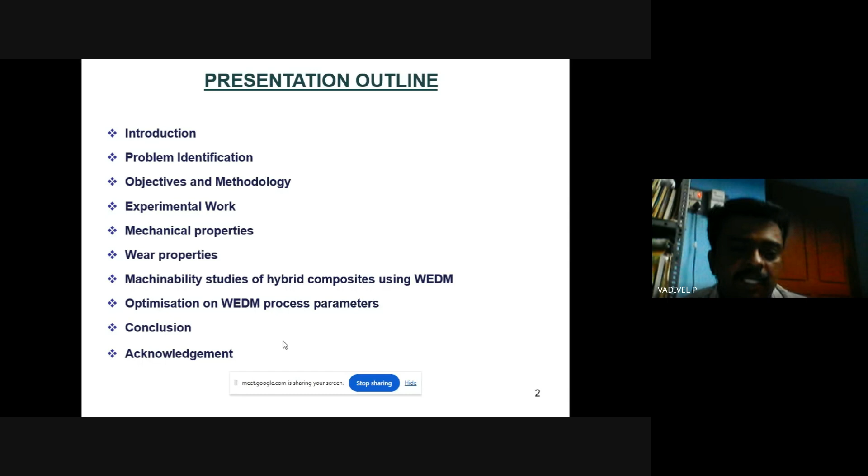First of all we can see the introduction, problem identification, objectives, and the methodology we have conducted, the experimental work, and testing like mechanical properties, wear properties, and machinability studies of hybrid composite using wire EDM. We have also optimized the wire EDM process parameters, and then conclusion and acknowledgement.

So first, everyone knows, but a small introduction about metal matrix composites. We know that a composite material is a combination of two or more dissimilar materials having a prominent interface between them. So it is a combination of two or more dissimilar materials, and here we have to focus on the dissimilar materials. There are different materials which we combine into one part, making the performance output from that. The properties of the resulting material will be superior to the individual materials.

If we have aluminium or steel, or whatever single individual material, the performance will be much lower. So while combining two or three materials, we improve the performance of the materials. Here we have matrix plus reinforcement, that is equal to a composite. We mix the matrix material, having a matrix of aluminium, and reinforcement of two materials, two ceramics, combining together to form a new composite material.

So where are we applying this material? The application is in aerospace, automobile, communication, defense, and also marine engineering. Why do we have to go to this new composite material? Because the high strength to weight ratio will be increased, so strength increases while reducing weight. We have also focused on excellent wear resistance properties, which we have obtained to be improved.

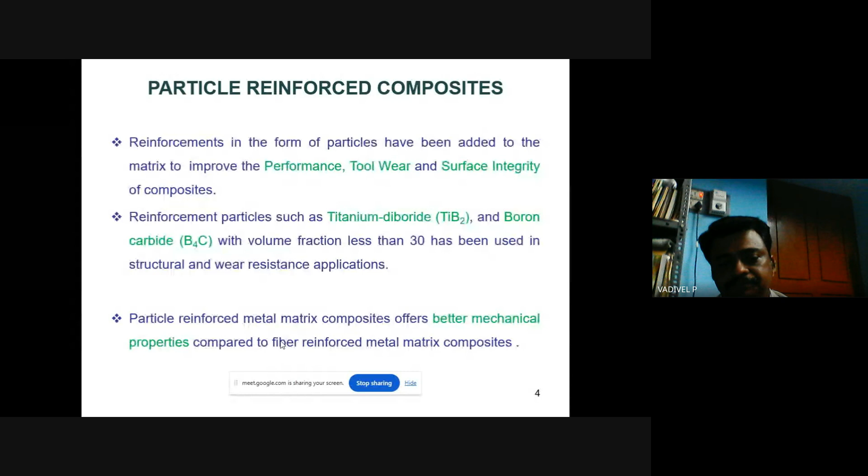I want to present the applications of metal matrix composites in specific components like automotive pistons. The automotive pistons are made of aluminum metal matrices, and it is used in exhaust guide vanes in gas turbine engines, pistons in reciprocating air compressors, drive shafts of automobiles, brake drums of cars, bicycle frames, ventral fins, fuel access cover doors in military aircrafts, and rotating blade sleeves in helicopters. There are a variety of applications used now.

Right now we are using battery operated cars. With electric bikes or cars, we can see that the weight is negligibly less compared to earlier versions of automobiles. It is very lightweight because of the application of metal matrix aluminum composite materials.

The manufacturing methods for producing metal matrix composites: how do we manufacture them? In industry, various methods are used for manufacturing MMC, like diffusion bonding, powder metallurgy, spray co-deposition method, in-situ solidification, and casting processes. In the casting process, it is a very simple, economical, and feasible method to produce the metal matrix composite, so for simplification of production we have chosen the casting process.

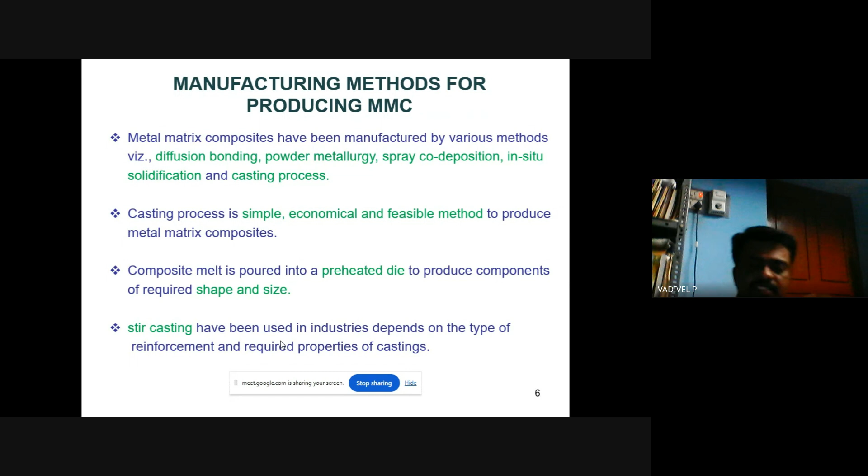This is the schematic diagram of a stir casting setup, using an electrical motor with a stirrer screw, reinforcement furnace, crucible, rotor, and liquid metal. The furnace temperature is maintained at an average of 780 degrees Celsius, the stirring speed is maintained at 800 rpm, and the stirring time is a maximum of 10 minutes. The die is preheated to 225 degrees Celsius, and the reinforcement preheating temperature is 300 degrees Celsius.

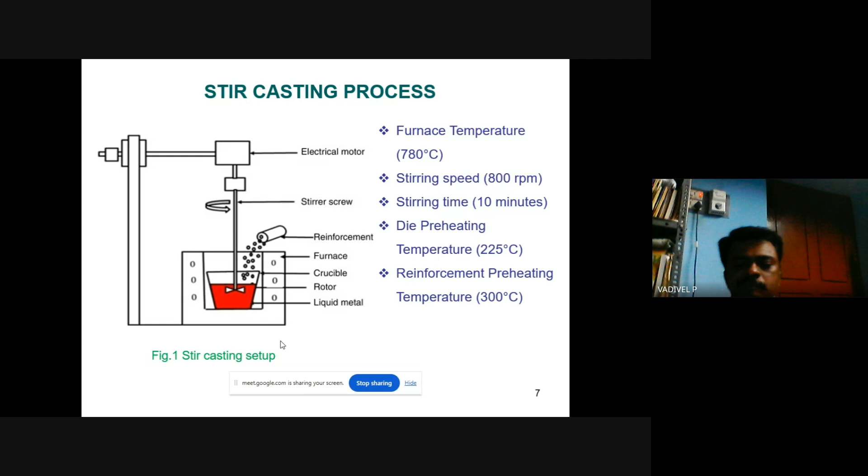The preheating of the reinforcement is required because, compared to the aluminum matrix which is softer, the reinforcing ceramic is a very hard material. So the bonding will not be proper. To improve that bonding, we have to preheat the reinforced material up to a particular temperature, and it should be maintained at that temperature for a few minutes.

Now we come to the machining of metal matrix composites. Machining of composites can be processed by conventional or non-conventional machining processes. After preparing the new metal matrix, it is machined using conventional and non-conventional machining processes. We have used non-conventional machining processes because conventional machining has lack of capability for intricate shapes, profiles, and hard reinforcements in composites.

The cutting and machining of this material is not feasible with conventional machining processes. We may not attain proper shapes or profiles, and sometimes the hard reinforcement will come out of the material. So instead of conventional machining, we have chosen the unconventional machining process.

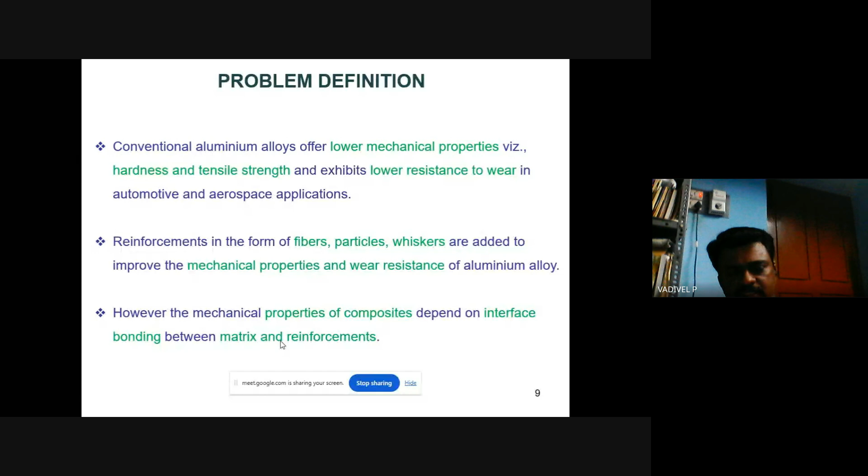Many previous researchers have reported that weight percentage of reinforcement - here we have chosen titanium diboride and boron carbide - influences the mechanical properties of the casting. Also, the stir casting process parameters like pouring temperature and stirrer speed improve the mechanical properties of the composite. These are the parameters which influence the mechanical strength of the aluminum composite material.

These three parameters have maximum influence, so we have focused on them. When coming to wear properties, dry sliding wear parameters like load, velocity, and sliding distance influence the wear rate of the material. Hence we have chosen and optimized these dry sliding parameters for obtaining the minimum wear rate.

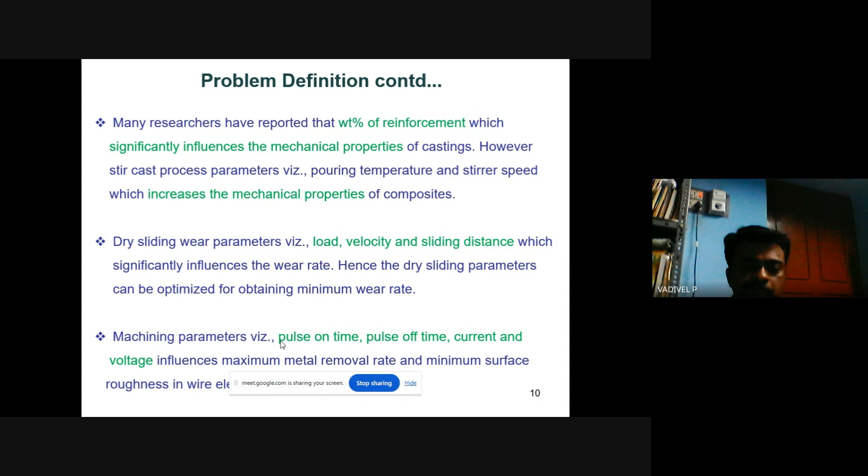When coming to the machining parameters in wire EDM: pulse on time, pulse off time, current, and voltage. These four parameters influence the maximum metal removal rate and minimum surface roughness in the wire electric discharge machining process. So these are the objectives of the research here.

The objective is to manufacture the metal matrix composite by reinforcing titanium diboride and boron carbide in the matrix of aluminum LM13 alloy by the liquid metallurgy route, and investigate the microstructure of reinforcement particles. We will discuss material properties like hardness, tensile strength, and ductility with varying percentages of titanium diboride and boron carbide, and also tribological properties like wear. We are going to focus this research on these areas.

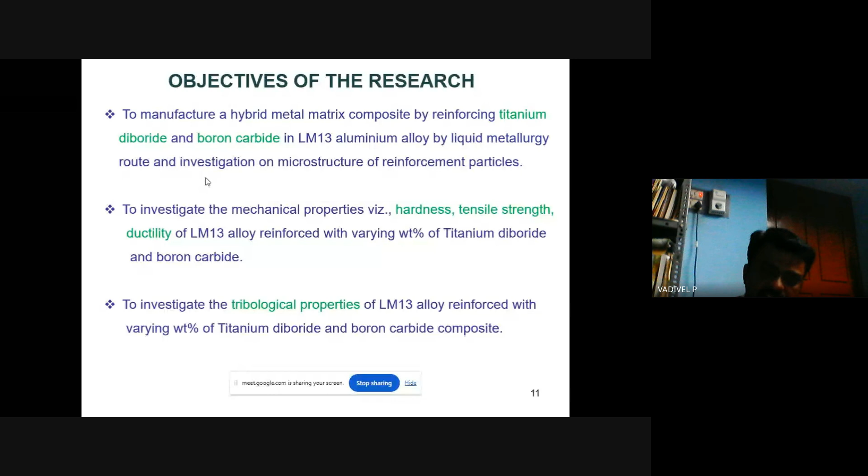We have chosen reinforcement of titanium diboride up to 10 weight percentage and boron carbide up to 5 weight percentage, and investigated the effect of process parameters like pulse on time, pulse off time, current, and voltage in wire EDM, to optimize the wire electrical discharge machining process parameters for obtaining maximum metal removal rate and minimum surface roughness of the aluminum LM13 hybrid composites.

Here is the research methodology flow chart with LM13 aluminum alloy and boron carbide, which in general we call ceramics. First we prepare the metal matrix of aluminum LM13 alloy - we melt the aluminum alloy, and the reinforcement is preheated and added to the LM13 aluminum alloy.

After that, we prepared the composite melt using the stir casting process with varying weight percentage of 0 to 10 weight percentage titanium diboride and 5 weight percentage boron carbide. After mixing is done, the manufacturing of the aluminum alloy composite is complete, and then the hybrid composite is analyzed for microstructure, hardness, tensile test, and wear test.

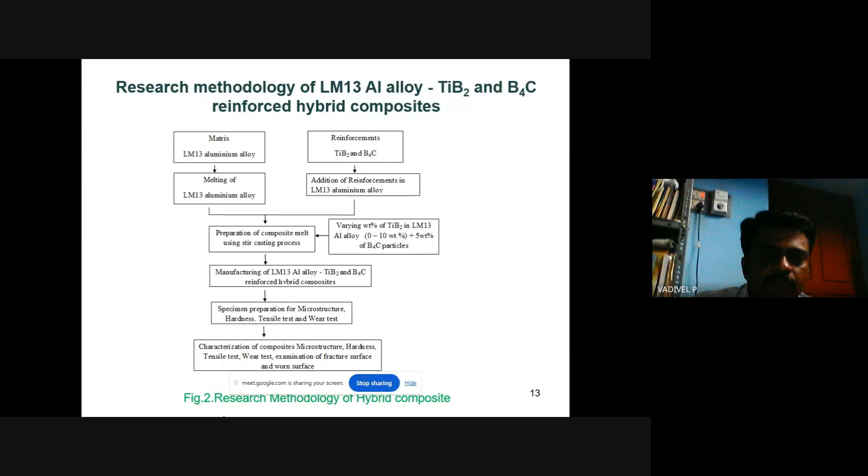For the wire EDM machine, we have chosen the pulse on time, pulse off time, current, and voltage. Then the design of experiments using RSM, response surface methodology, has been done. Then machining of the composite as per the experimental design, and measuring the responses, namely the metal removal rate and the surface roughness.

We have done the analysis of variance and developed the regression analysis using the ANOVA table, and developed the regression equation for the material removal rate and the surface roughness. Then finally, we optimize the wire EDM process parameters for higher metal removal rate and minimum surface roughness value.

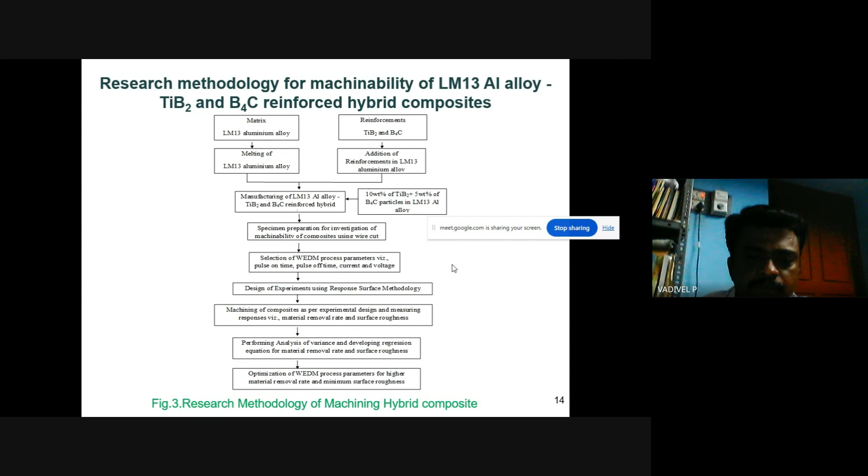What we have done, in two stages: one is where we prepared the new hybrid material and investigated the material properties, and the other is where we did the machining process parameters and identified the conditions for metal removal rate and minimum surface roughness. So this is the work plan of what we have done.

In manufacturing, we have done the aluminum alloy with boron. We mixed the aluminum matrix and composite materials using the stir casting process, investigated the mechanical properties of this new hybrid composite by stir casting, and studied the tribological behavior of the LM13 aluminum alloy with titanium diboride and boron carbide particulates by stir casting.

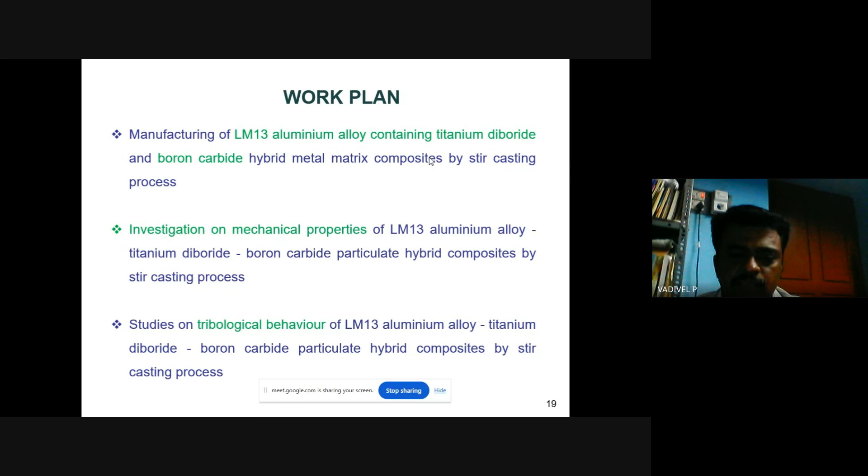We conducted machinability studies of the aluminum alloy particulate hybrid composite using wire electrical discharge machining. For optimization, we performed the electrical discharge machining process to achieve higher metal removal rate and minimum surface roughness of the LM13 alloy with titanium diboride particulate hybrid composites.

So here we come to the experimental work: how the manufacturing of this LM13 aluminum alloy with boron carbide and titanium diboride is done. First we had the matrix aluminum alloy, then the weight percentage of titanium diboride was varied from 0 to 10 weight percent, with a constant 5 percent of boron carbide kept, and prepared using the stir casting process.

We varied the percentage of titanium diboride from 0 to 10, with a constant 5 percent weight of boron carbide for this process. The hybrid composites were prepared using a stir casting setup consisting of an electrical induction furnace with a melting capacity of 780 degrees Celsius, and a stainless steel crucible with a melt capacity of 2 kg.

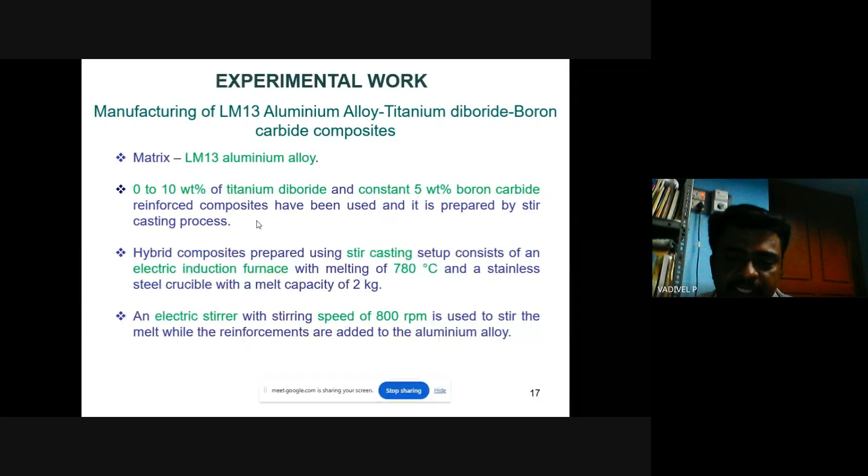Safety must be maintained while using this stirrer speed, because it may injure the person operating the electric stirrer. So finding the optimum value of the stirrer speed is very crucial, and we conducted many trials with very careful safety precautions.

We have chosen the cylindrical die made up of die steel, because it will be useful for machining the hybrid material. Some other researchers have used a rectangular or square shape material, but we have chosen the cylindrical die because for machining this aluminum material, the cylindrical die is very much helpful in machining.

The aluminum alloy is melted in the furnace, and the reinforcement is preheated to 300 degrees Celsius. The preheating of reinforcement is very important, because if the matrix aluminum metal is at a very hot temperature and the reinforcement is not preheated, the bonding between the aluminum material and the reinforcement is not good.

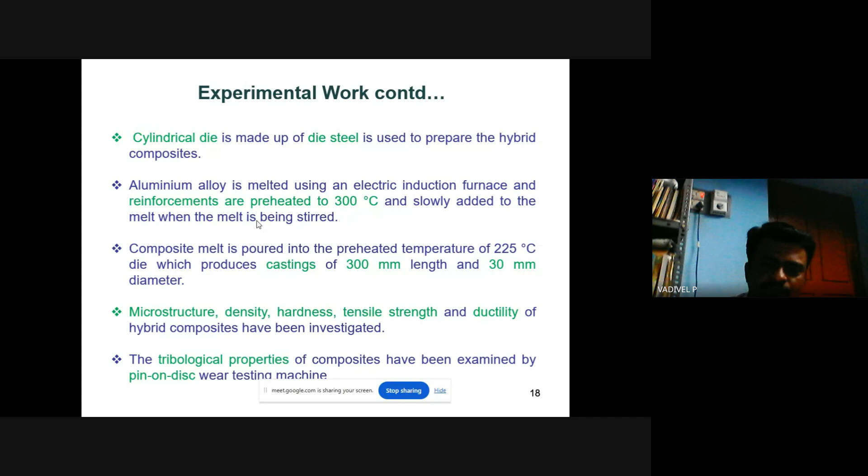In the first trial, preheating was not done for the first two or three trial experiments. At that time we identified that the bonding between the aluminum and the titanium diboride and boron carbide had no proper bonding, so it breaks like a brittle material. The titanium diboride was not fully mixing with the aluminum alloy.

After preheating, at the time of the seventh trial, we used the preheated material, so the bonding is very good between the aluminum and the reinforcement material.

After preheating to 300 degrees Celsius, the reinforcement is slowly added to the melt and stirred at a speed of 800 rpm. The composite materials are preheated to a temperature of 225, and importantly, the die is also preheated up to 225 degrees Celsius. So the die is preheated and the reinforcement is also preheated - these are the main parameters we focused on in this work.

The casting which we produced is about 300 length and 30 diameter. After that, the microstructure, density, hardness, tensile strength, and ductility of this hybrid composite has been investigated, and the tribological properties of composites have been examined on the pin on disc wear testing machine.

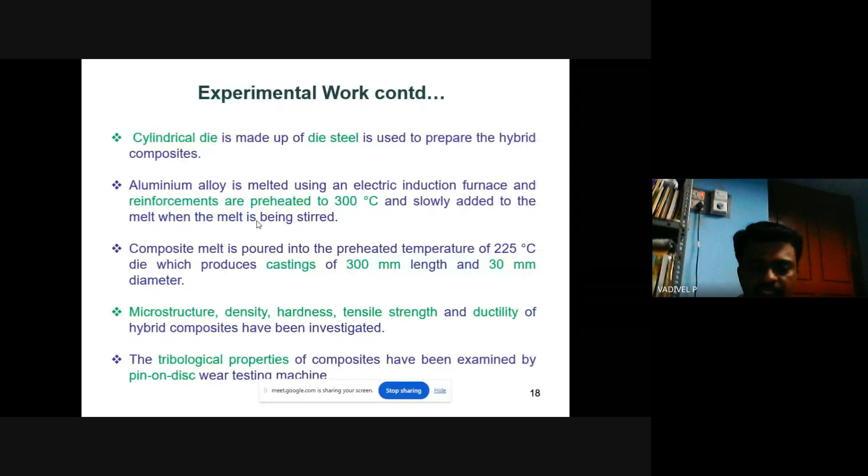Worn surface of the wear test specimen has been analyzed. The machined surface is analyzed by using the SEM.

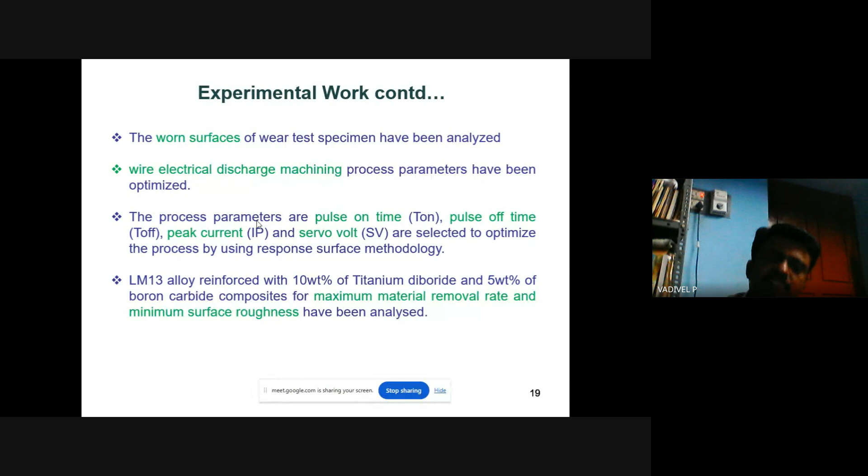The wire electric discharge machining process parameters have been optimized. The process parameters are pulse on time, denoted as T on, pulse off time, T off, peak current denoted as IP, and servo voltage SV, selected to optimize the process by using RSM, response surface methodology. These are the parameters in the wire EDM machine used for optimization.

The LM13 aluminum alloy reinforced with 10 weight percentage of titanium diboride and 5 weight percentage of boron carbide composites for maximum metal removal rate and minimum surface roughness have been analyzed. We chose 10 and 5 weight percentage because these are the maximum weight percentages of these ceramics used for analysis of MRR and minimum surface roughness.

First we tested the element, pure aluminum. Before manufacturing these hybrid composites, before processing and starting the work, we tested using FESEM analysis, field emission scanning electron microscope, the elements which are present in the LM13 aluminum alloy.

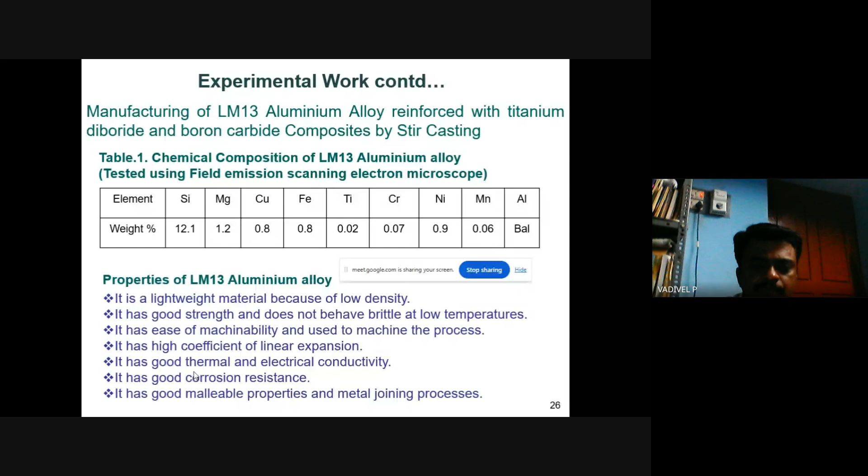The physical properties of the LM13 aluminum alloy: it has a density of 2.7, and the melting point is 695 degrees Celsius. The modulus of elasticity is 73 megapascal. Ultimate tensile strength is 572 megapascal. The Poisson's ratio is 0.33, the fatigue strength is 159 megapascal, and the yield strength is 503 megapascal.

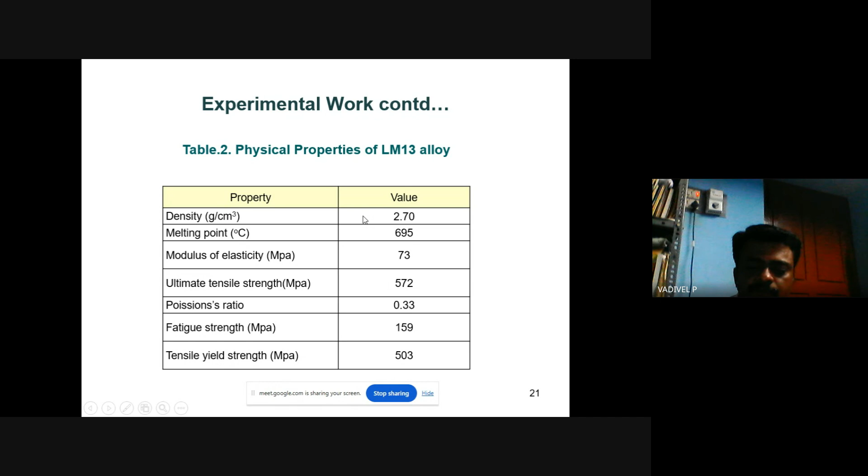The physical properties of the ceramic we have used is boron carbide. We selected boron carbide because of its extreme hardness, and it is difficult to mold to high relative densities while not utilizing sintering aids. It has good chemical resistance, good nuclear properties, and low density. Because of these important properties, we have chosen boron carbide.

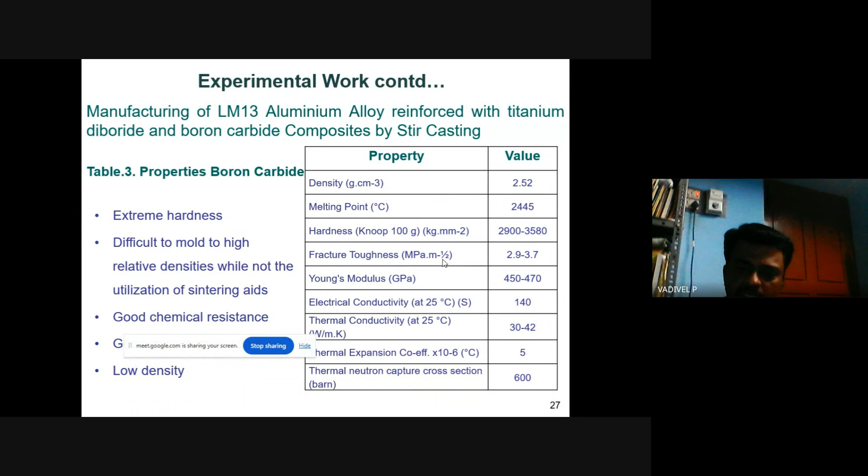The property values are listed here: density, melting point, hardness, fracture toughness, Young's modulus, electrical conductivity, thermal conductivity, thermal expansion, and thermal neutron capture cross section. With all these property values, we have selected boron carbide.

This is a list of properties of titanium diboride. This is because impact resistance is needed for armor. Titanium diboride is used as resistant in armors and cutting tools, crucibles, neutron absorbers, and wear resistant coatings. Because of these advantages and very good properties, we have chosen titanium diboride.

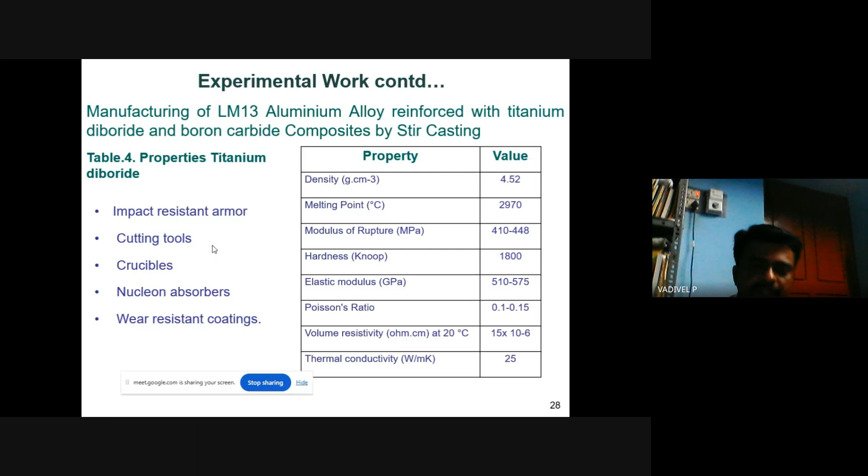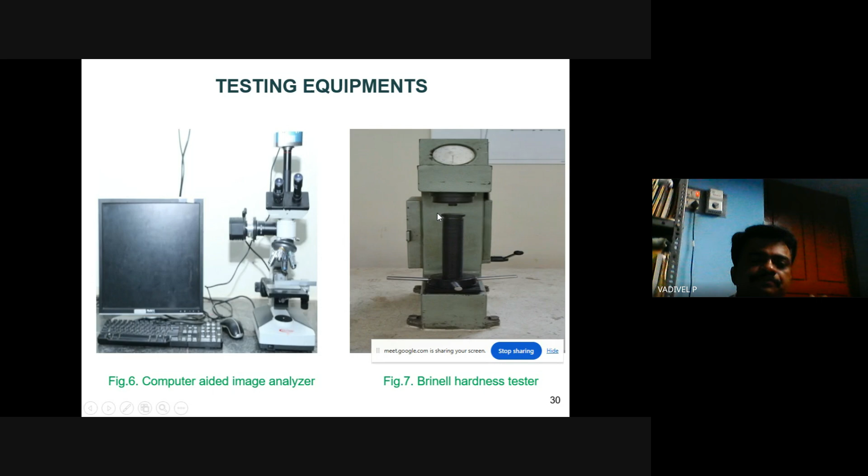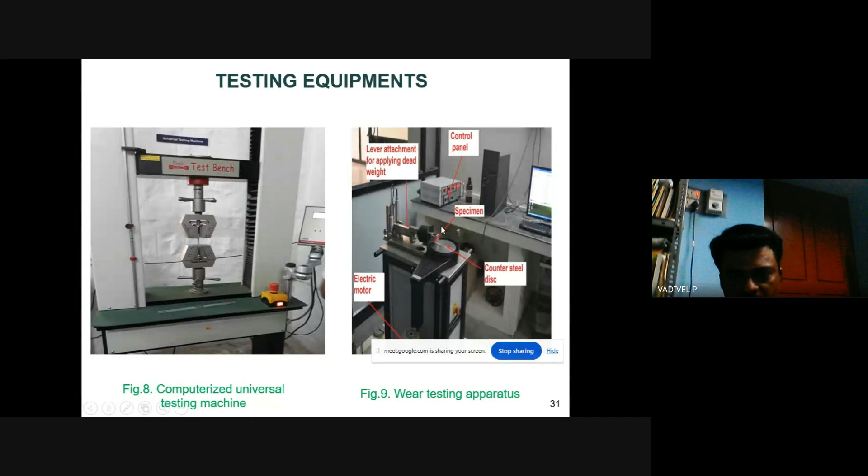This is a counter steel disc. The specimen is rotated against the disc, and the electric motor here is used to rotate the disc.

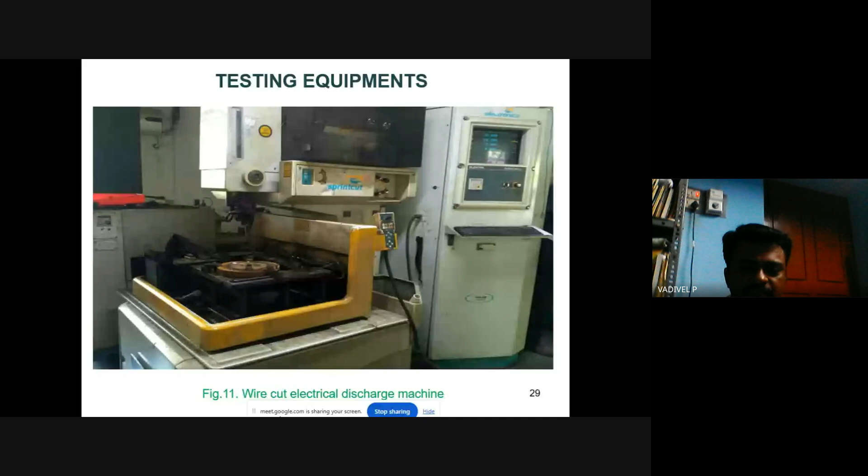The third composition is LM13 with 2.5 weight percentage of TiB2 and 5 weight percentage of boron carbide. The fourth one is LM13 with 5 TiB2 and 5 B4C. And the last one is 10 TiB2 and 5 boron carbide.

The weight percentage of titanium diboride ranges from 0 to 10, and the weight percentage of boron carbide is 0 to 5. As already discussed, boron carbide is kept constant at all levels, and we have varied the weight percentage of titanium diboride.

The ultimate tensile strength of the obtained material is 121 megapascal, 138 megapascal, 151 megapascal, and 174 megapascal. Finally, the percentage of elongation is 11, 9.2, 9, and 8.1. These are all the mechanical properties we obtained by varying the weight percentage of the reinforcements.

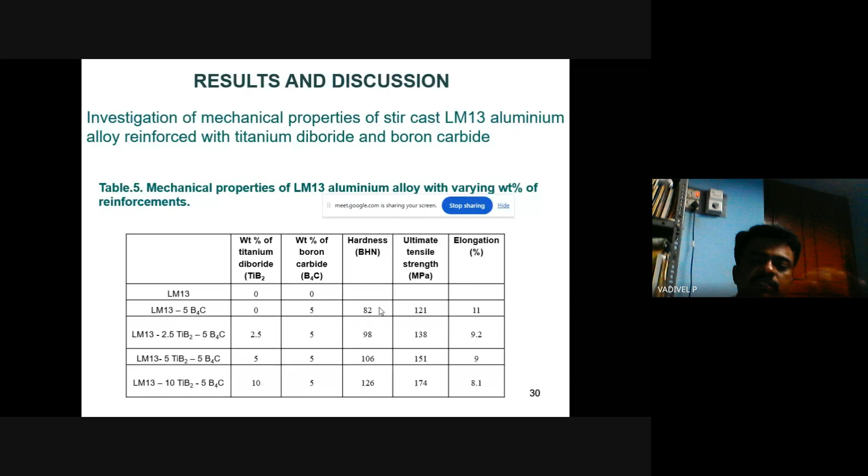So in the microstructure you can see the titanium diboride and boron carbide were uniformly dispersed in the aluminum. The first picture shown is A. Picture A is the pure aluminum.

LM13 aluminum alloy with the dispersed reinforcement. Here is the microstructure of LM13 aluminum alloy. In picture B, you can see the titanium diboride and boron carbide.

This is the particle shown in the red mark, that is titanium diboride and boron carbide. This is attributed to the high stirring speed which produces a vortex during the process of composite formation.

The particles are distributed throughout the material. So the microstructure study reveals that the mixing of the aluminum matrix and the reinforcement is uniform all over throughout the matrix.

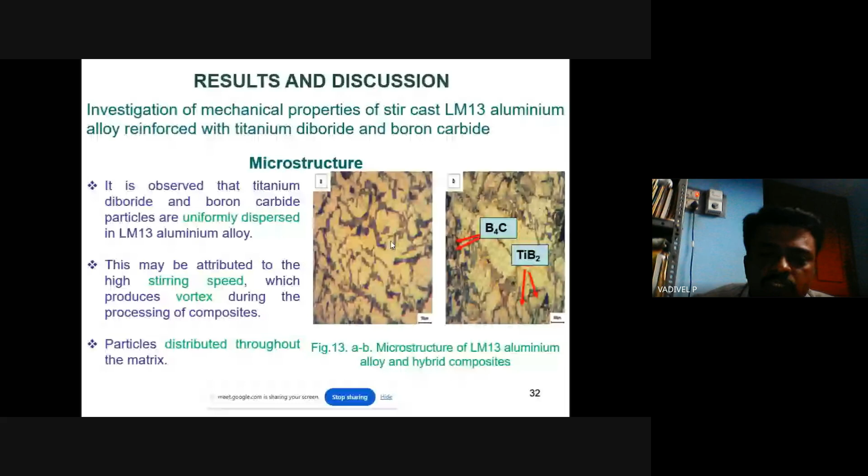So to confirm this mixing or dispersion, we have done the microstructure study for several samples.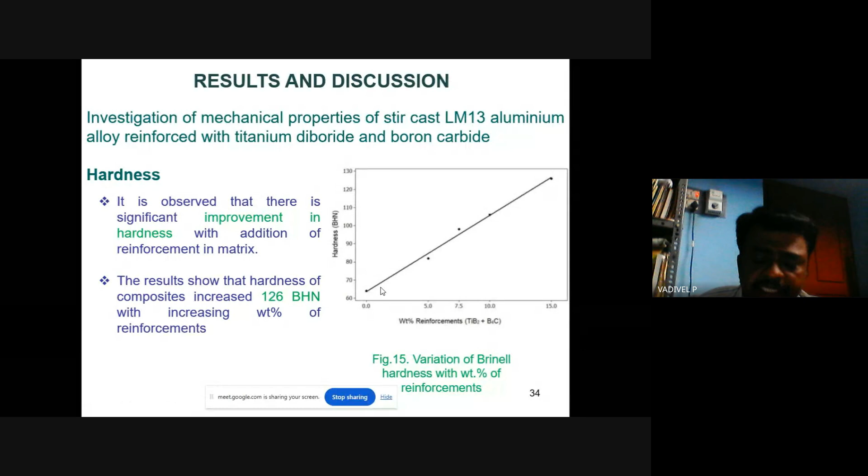While plotting the tensile strength, we have reinforcement on the X axis and tensile strength in megapascal on the Y axis. The test results show that the maximum strength of 174 megapascal is observed for composites containing 10 weight percentage of titanium diboride and 5 percentage of boron carbide.

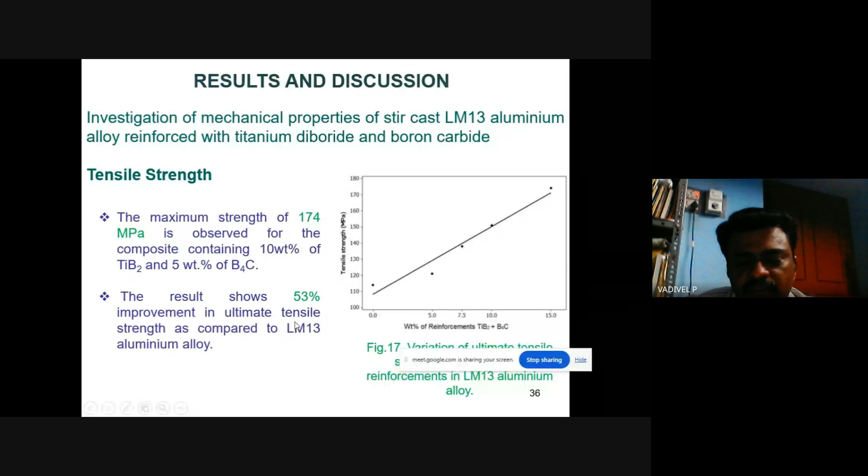So the maximum weight percentage of ceramics has the highest tensile strength we obtained, which is 174 megapascal. When compared to the earlier results, this is improved, with the ultimate tensile strength increased by 53 percentage compared to the LM13 aluminum alloy. So this is a very good result which we obtained after many iterations.

And now coming to the fracture surface of the hybrid composites. Here you can see the micro pore holes between the crack nucleating points. So in this fracture, the fracture surface shows the same result.

You can see some dimples, meaning there are some valleys. Dimples are shown here, like if we break a chalk piece, the cross section of the area will not be uniform. There will be some holes or projections.

So we can see the dimples here. The hybrid composites had dimples on the surfaces. This indicates better interface bonding between the matrix and the reinforcements. Because of these dimples, it is confirmed that there is better bonding between the matrix and the reinforcement.

So the micro pores between the matrix and the reinforcement act as a crack nucleating point, and the crack propagates towards the particle agglomeration regions, which results in the fracture of the composites. Because of these micro pores, the crack is initiated at some point and tends to break the sample.

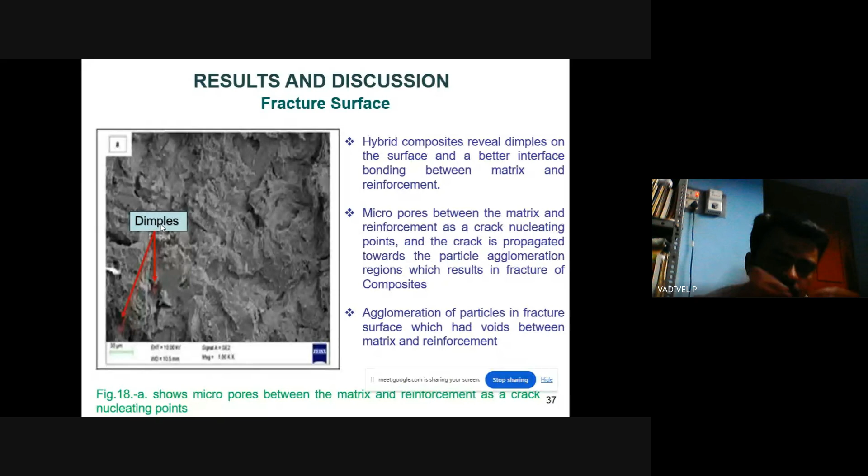So the agglomeration of the particles in the fracture surface had voids between the matrix and the reinforcement material.

So this picture shows the dimple, meaning it is like a hollow, shown with an arrowhead. The TiB2 is placed here, and boron carbide is placed here. This shows that in some particular regions, all the ceramics are evenly distributed.

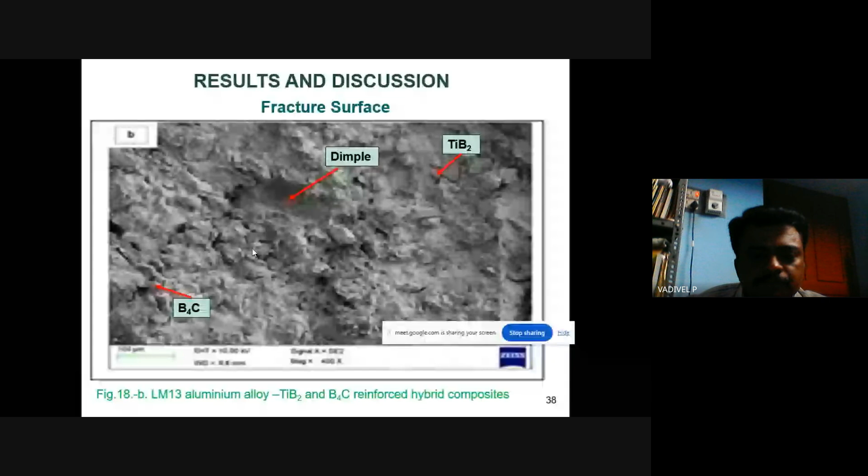See the agglomeration in this picture, the mixing of material and ceramics is shown. Because of this agglomeration, the crack may be initiated.

Now we are coming to the dry sliding wear properties, the effect of sliding distance. The wear test is done with a sliding distance of 2000 meters under a constant load of 20 Newton.

The weight loss decreased up to 67% by adding 10 weight percentage of TiB2 and 5 weight percentage of boron carbide. For this material, the wearing is done, and the weight loss stopped at some particular point. After that, the weight loss is very negligible.

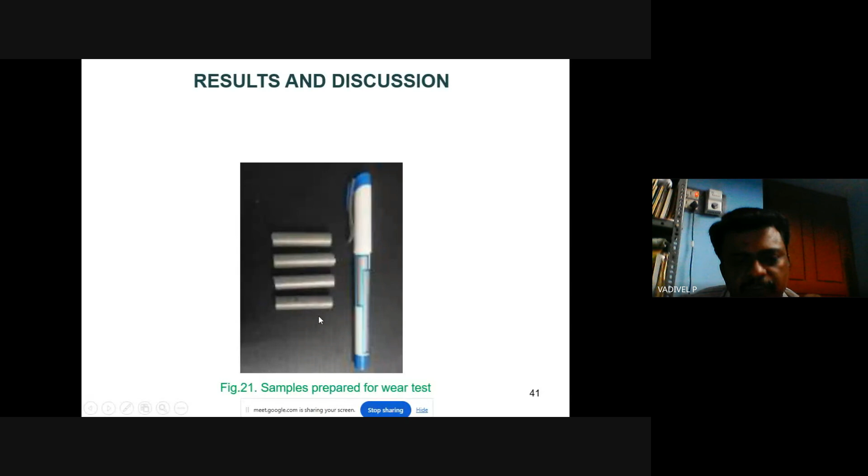The wear rate of the composites has been decreasing with increasing weight percentage of reinforcement in LM13 aluminum alloy, and the minimum wear rate of 0.0068 milligram per meter is observed in the study.

The next plot is between the coefficient of friction and the sliding distance. The coefficient of friction decreases with increasing sliding distance. We know the value of friction in brakings, in brake drum and brake shoe - the friction between the brake drum and the brake shoe. Without friction, the brake will not stop and the vehicle will not stop.

For that purpose we have undergone this friction study. The average coefficient of friction we obtained, with 15 weight percentage of reinforced composite and matrix, is 0.39 and 0.312 respectively.

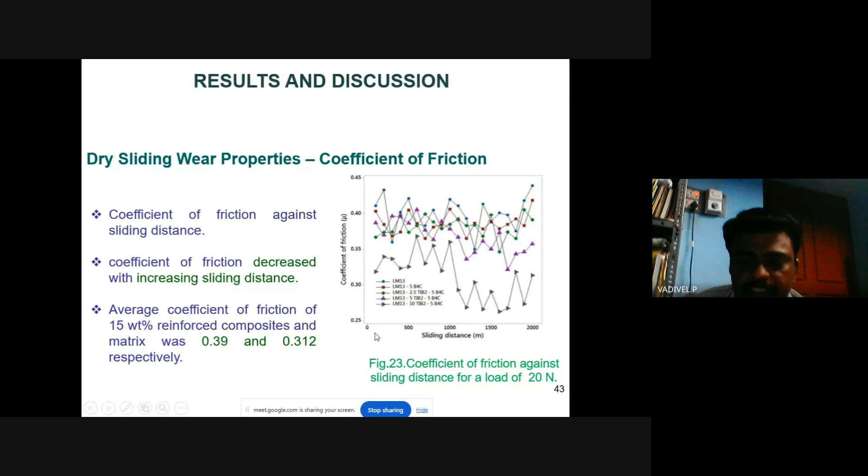In this study, zero weight percentage of TiB2 and zero weight percentage of boron carbide, that is only LM13 aluminum alloy, is used. The wear test is done on the pure LM13 aluminum alloy.

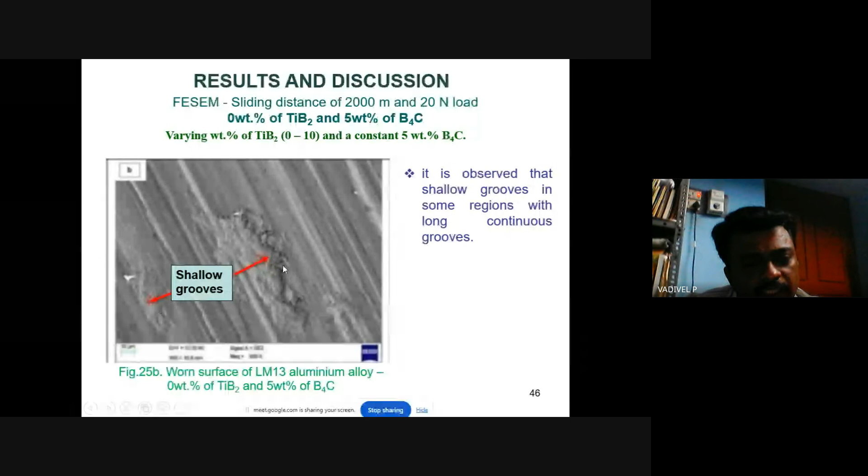This is the next level, with 2.5% titanium diboride and 5% boron carbide. Here you can see debris and shallow grooves observed on the surface, which reveals continuous grooves and shallow grooves parallel to the sliding direction.

The next one is 5% titanium diboride and 5% boron carbide. Here you can see fine grooves on the surface, which is likely attributed to the high hardness of the composites, decreasing the weight loss observed during the wear test.

The next one is 10% titanium diboride and 5% boron carbide. One surface of this specimen with 10 and 15 weight percentage shows fine grooves as compared to the other composites. Compared to the previous ones, the grooves are very smooth and fine, following the sliding direction of the material, which gives a good result.

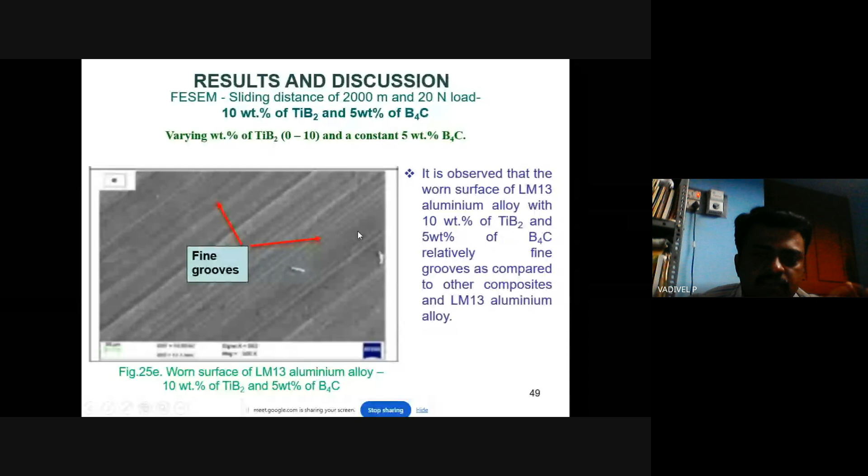With the load test, this is the FESEM image with 20 Newton of load applied on the specimen. With 30 Newton load applied on the wear test apparatus, we obtain shallow grooves.

When 40 Newton of load is applied, we observe deep continuous grooves, and delamination is also noted. With a load of 50 Newton, delamination is maximum, revealing deep grooves with delamination observed in most regions. The composite tested at lower load shows fine grooves, while delamination becomes predominant at higher loads.

Now we come to the machinability studies of this hybrid composite of aluminum alloy, titanium diboride, and boron carbide, using the wire electrical discharge machine. This is the picture of the wire EDM setup.

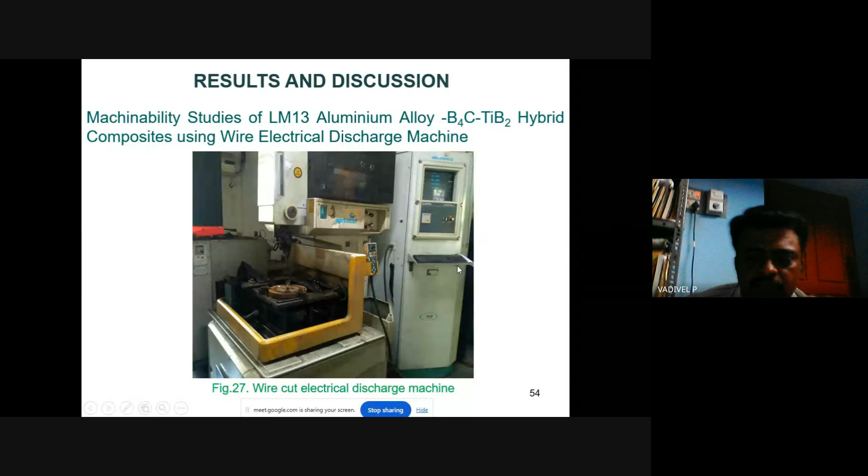Here are the process parameters and their levels used for machining: voltage, current, pulse on time, and pulse off time, along with their units. We have chosen levels from 1 to 5 for these process parameters.

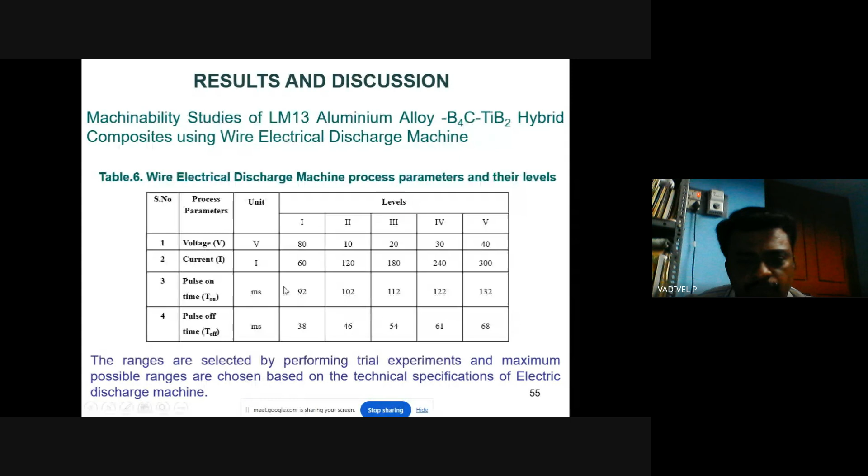These ranges are selected by conducting trial experiments, and the maximum possible ranges are chosen based on the technical specifications of the electrical discharge machine. So with this, we determined the parameters and their levels.

The metal removal rate is the weight of metal removed per unit time during the EDM process. An increase in peak current and pulse on time increases the metal removed. The metal removal rate is directly proportional to the product of energy transferred per pulse and frequency, hence an increase in peak current increases the MRR of the composite.

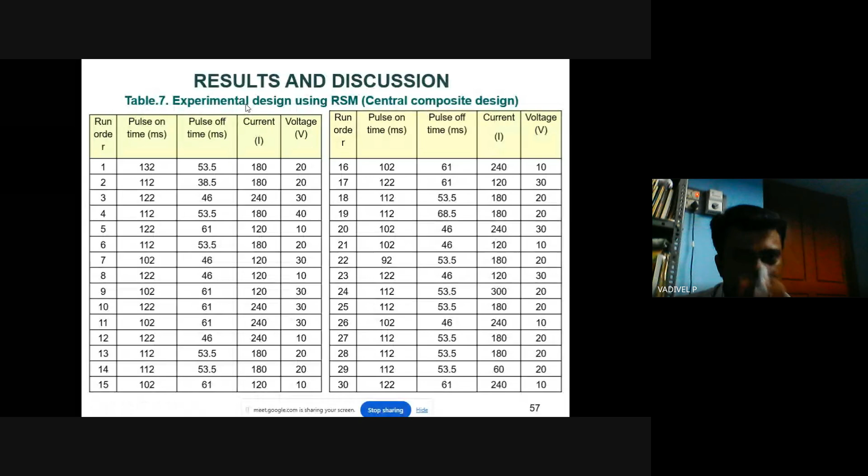The experiment is done using the central composite design, part of the response surface methodology (RSM) experimental design. The run order is fixed from 1 to 30, varying pulse on time, pulse off time, current, and voltage, and the results are obtained accordingly.

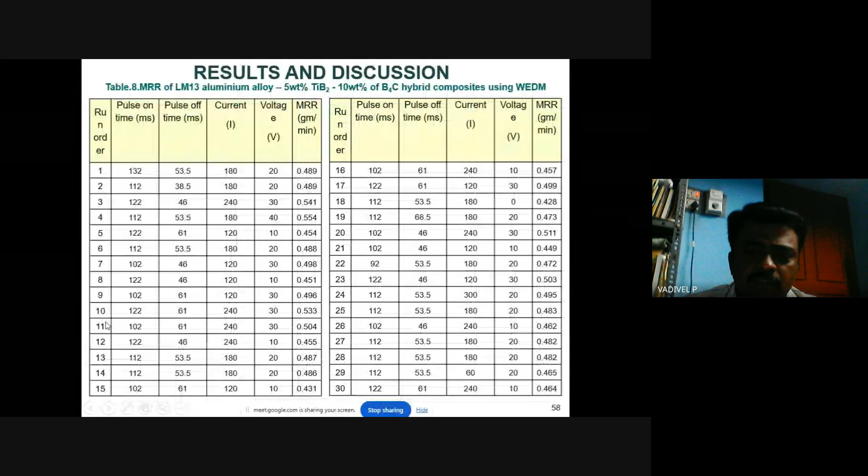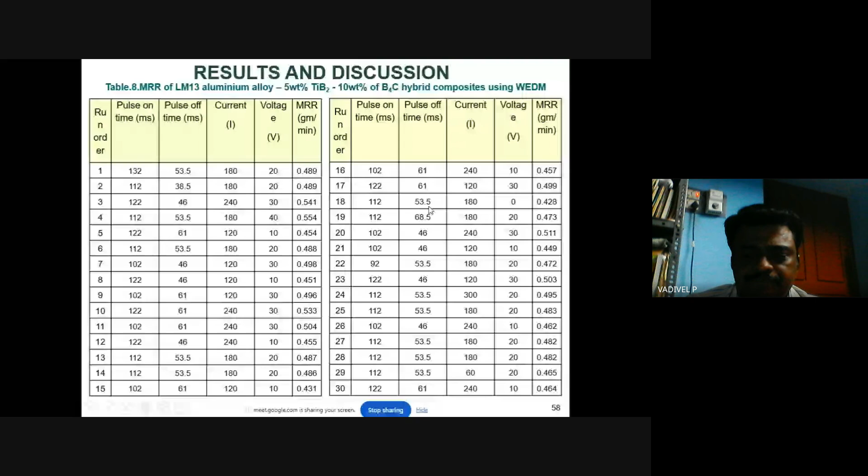This is the chart for 5 weight percentage titanium diboride and 10 weight percentage boron carbide composite machined using wire EDM, showing the metal removal rate, followed by the ANOVA table.

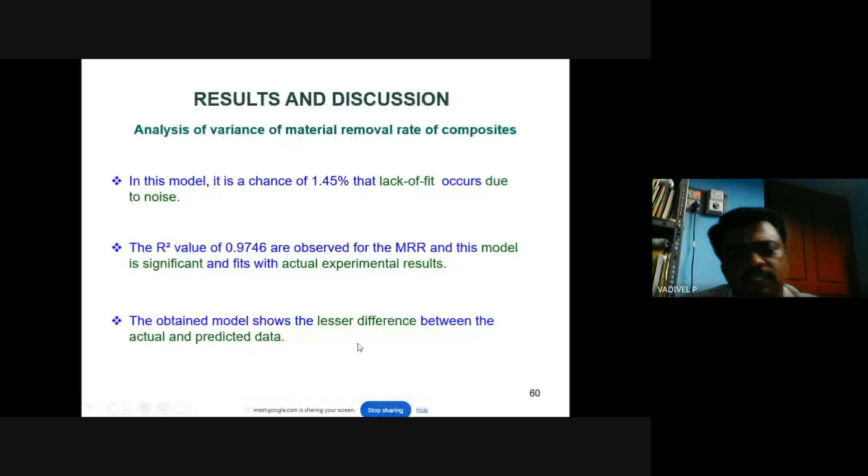In the analysis of variance for metal removal rate, there is a 1.45% chance that lack of fit occurs due to noise. The R-squared value of 0.9746 observed for MRR shows the model is significant and fits well with the actual experimental results, with the model showing a lesser difference between the actual and predicted data.

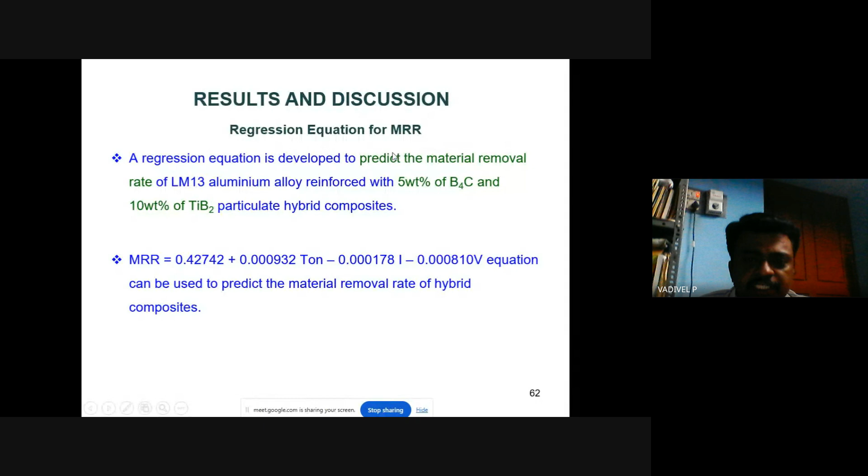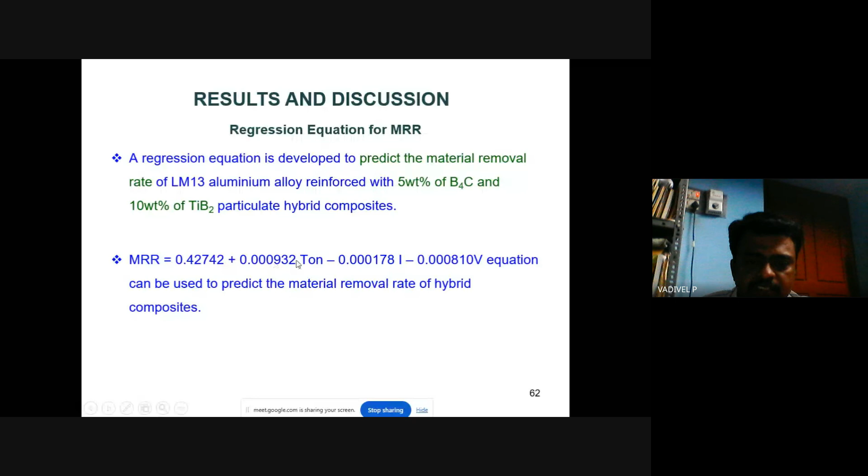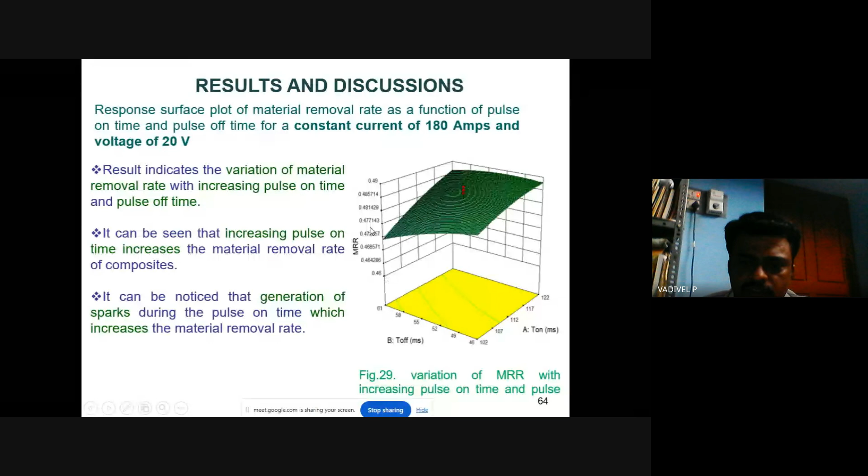So here you can see the result. This is the response surface plot for MRR as a function of pulse on time and pulse off time, for a constant current of 180 amps and voltage of 20 volts. This graph is plotted between the metal removal rate and T on and T off.

This shows that increasing pulse on time increases the MRR of the composite. It can be noticed that the generation of spark during the pulse on time increases the metal removal rate. When the pulse is on, the spark during the switching on time increases the metal removal rate.

The next plot is the variation of MRR with pulse off time of 54 and voltage of 20 volts. Here the plot is between current, T on, and MRR. You can see that increasing pulse on time slightly increases the metal removal rate of the composites.

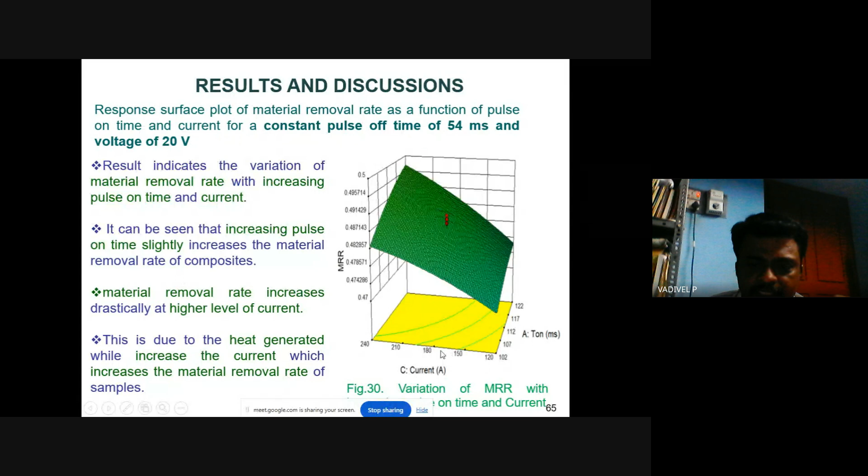The metal removal rate increases drastically at higher levels of current. When the current is increased, the metal removal rate increases drastically due to the heat generated. So the current influences the maximum part in the metal removal rate. This chart is for 54 ms pulse off time and 20 volts of voltage.

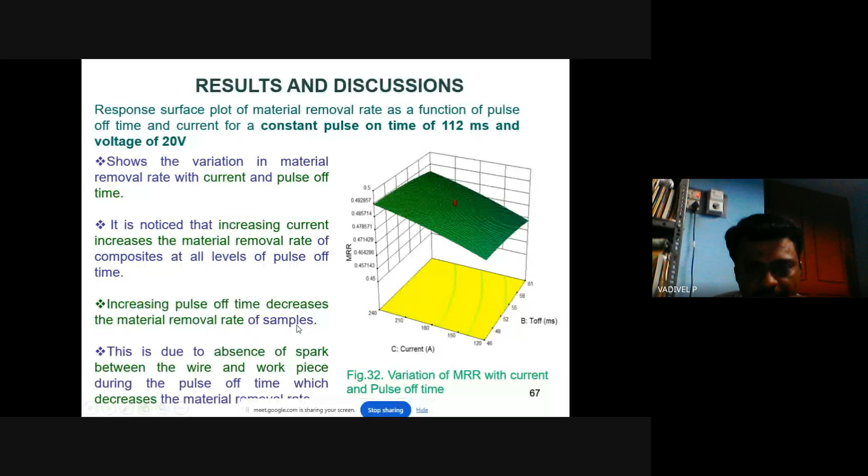The next plot is with 112 ms pulse on time and voltage of 20 volts, between current and T off. In these T off conditions, the pulse off time decreases the metal removal rate, due to the absence of spark between the wire and the workpiece. The spark influences the metal removal rate drastically.

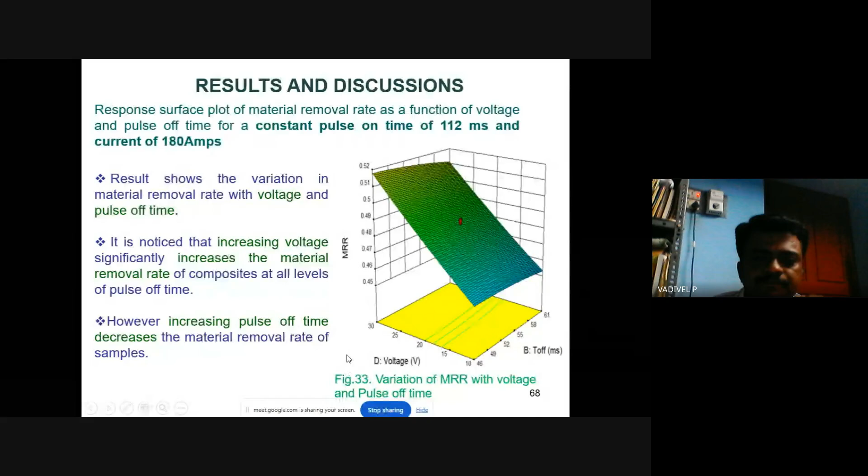This is the surface roughness tester used for our work, a Mitutoyo SJ210 make tester. After machining of the components, the surface roughness of each workpiece is tested by placing it over the surface table.

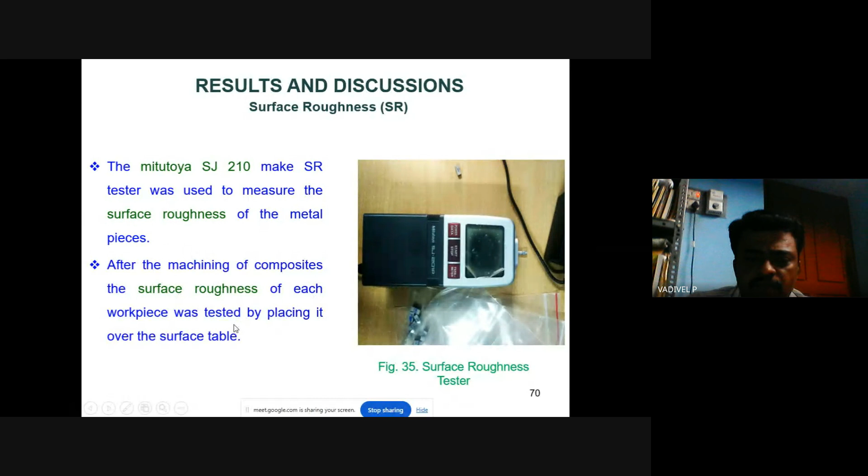The analysis of variance test results for surface roughness show this model has an 18.22% chance that lack of fit occurs due to noise, and an R-square value of 0.9817 was observed for surface roughness. The model is significant and fits well with the actual experimental results, showing the lesser difference between actual and predicted data.

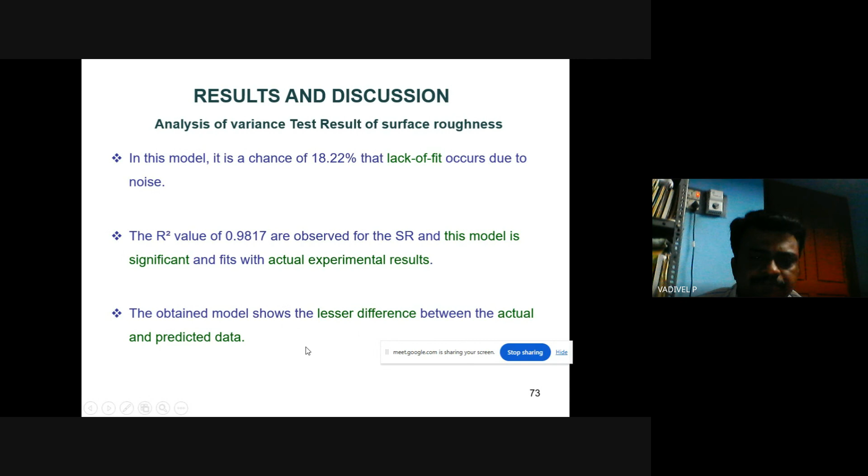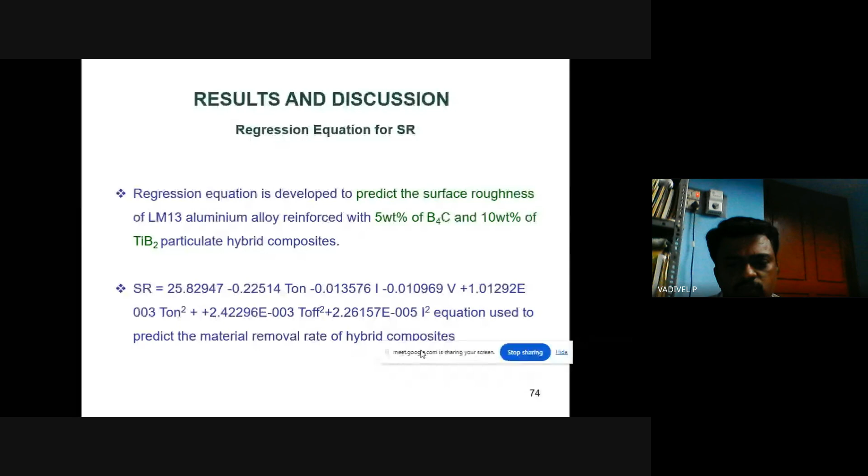So here the regression equation is developed. The regression equation for the surface roughness is developed to predict it. Surface roughness means how smooth or rough the surface is. The aluminum alloy reinforced with 5 weight percentage of boron carbide and 10 weight percentage of titanium diboride particulate hybrid composite has the predicted surface roughness. This equation is used to predict the material removal rate of the hybrid composites as shown.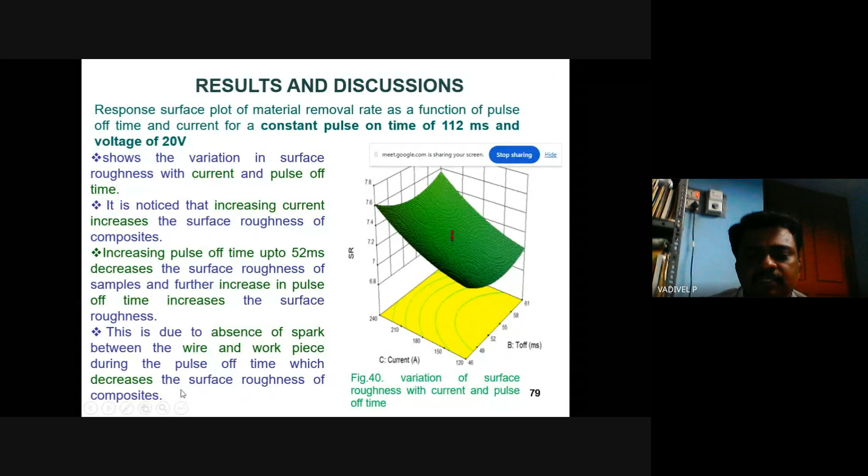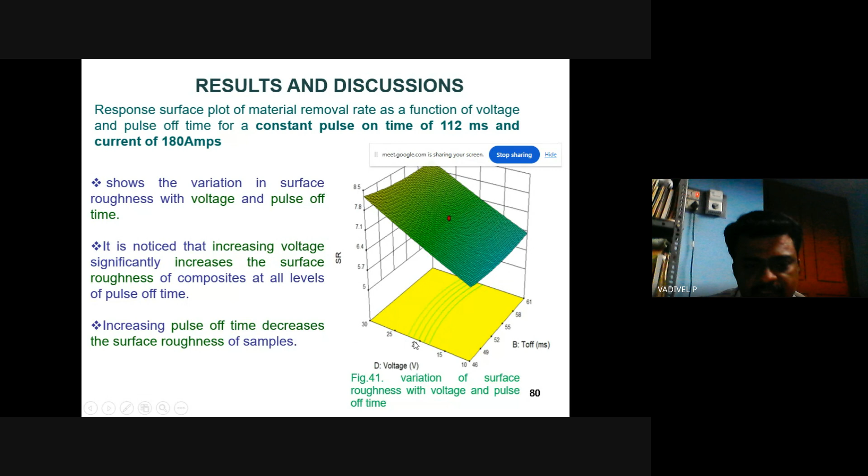In the conclusion part, the microstructure result shows uniform distribution of the reinforcement and minimum level of porosity in the composites. The mechanical properties like hardness increase with increasing content of reinforcement, with a maximum hardness of 126 BHN observed for the composites.

The tensile strength is increased by the addition of reinforcement with the ceramics. The maximum tensile strength obtained is 174 megapascal, observed for 10 weight percentage of TiB2 and 5 weight percentage of boron carbide. The tensile strength of the composite increases by an amount of 53 percentage compared to the unreinforced composite material.

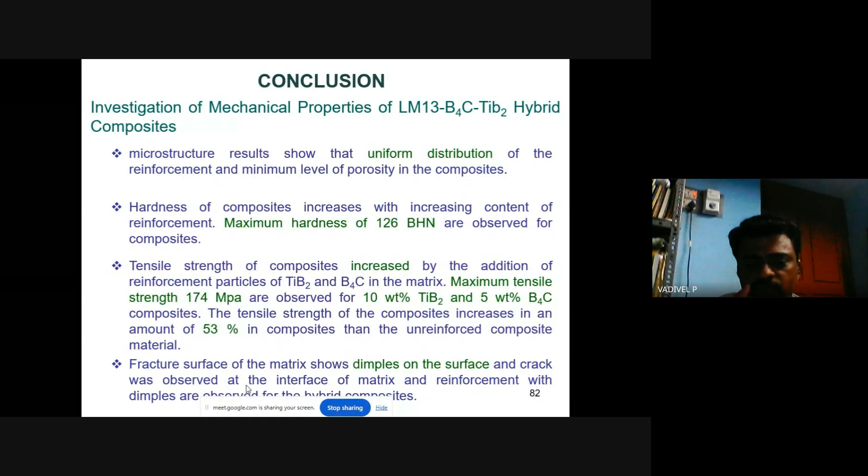When we come to the fracture surface of the matrix, it shows dimples on the surface, so the crack was observed at the interface of the matrix and the reinforcement, with dimples observed for the hybrid composites.

The next one is weight loss. The weight loss of the samples increases with increasing load and sliding distance. The average coefficient of friction for matrix and LM13 with 10 weight percentage and 5 weight percentage of boron carbide is 0.39 and 0.312 respectively. The cumulative weight loss is decreased up to 58 percentage with reinforcement of 10 weight percentage and 5 weight percentage.

The worn surface has continuous grooves on the surface along the sliding direction, and delamination is observed in most of the regions. Fine grooves are observed for composites at lower loads, and delamination at higher loads.

The ANOVA result shows that pulse on time, voltage, and current significantly influence the metal removal rate. The mathematical equation developed for prediction of the metal removal rate has R square and adjusted R square very close to each other, so this equation gives the MRR with excellent accuracy.

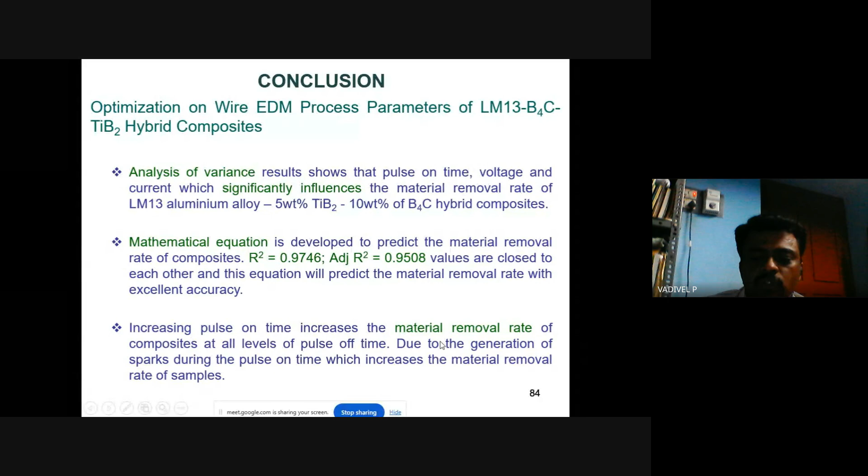Increasing the pulse on time increases the MRR due to the generation of spark between the material. The material removal rate is increased at all levels due to the higher amount of heat generated due to the application of voltage, and the metal removal rate of the composites.

When comparing, increasing current increases the MRR of the material, and increasing the pulse off time decreases the metal removal rate of the samples.

The pulse on time obtained is 109.5 milliseconds, and the pulse off time is 55.12 milliseconds, found to be the optimum process parameters, with the current of 161.37 amps and voltage of 10.41 volt, which offers higher material removal rate. So these are the optimized values we obtained.

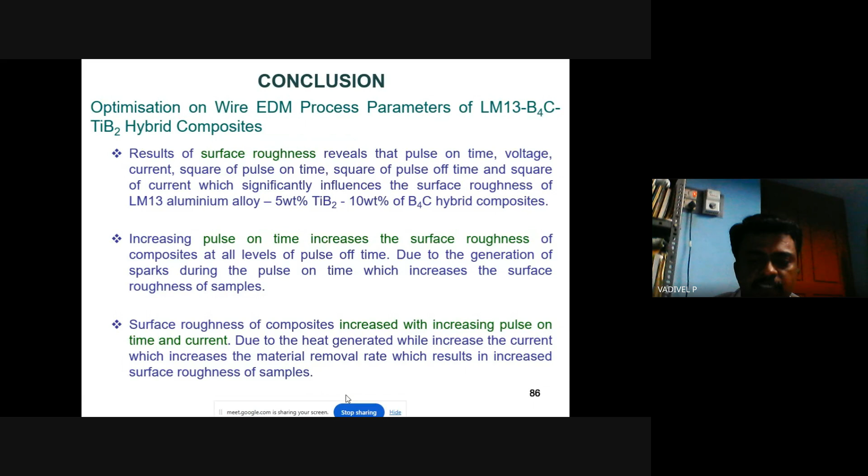With increasing pulse on time and current, the heat generation leads to increased surface roughness. And here I conclude my presentation, and the session is open to queries.

If you have any doubts or need clarification, I am waiting for your questions.

Thank you, sir. Thank you for your deep and pleasant explanation.

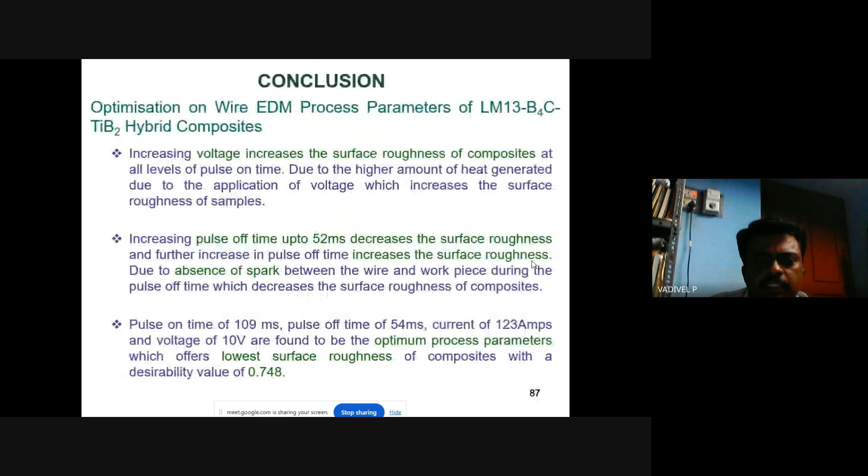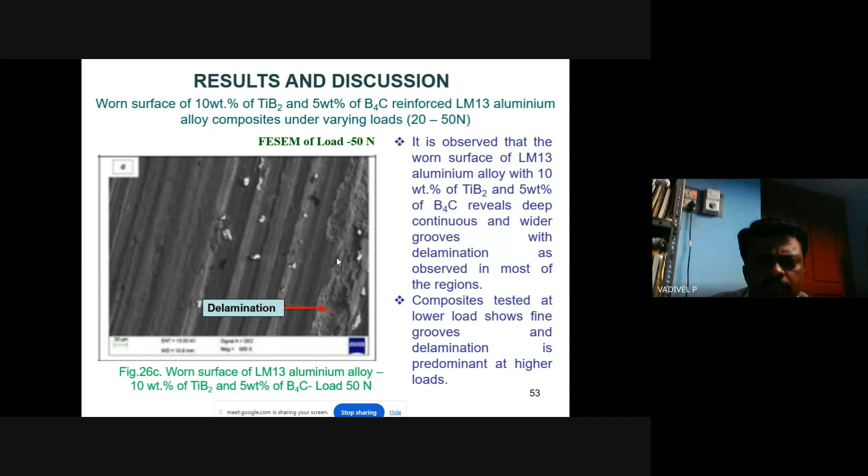Okay sir, the size of particles. Let me come to the slide, sir. So the particle size - is he asking about reinforcement particle size? Oh okay sir, I'm getting that.

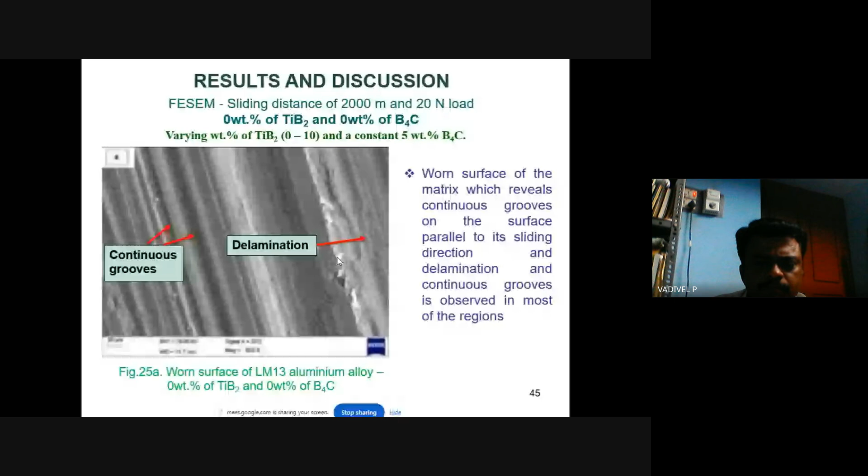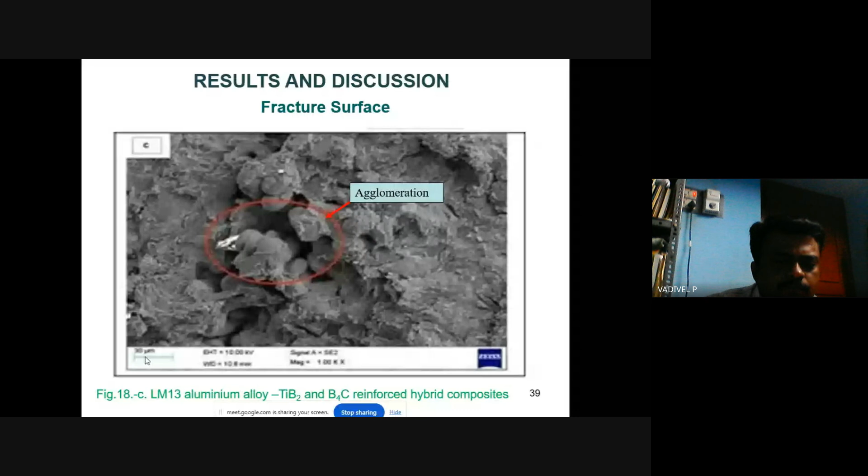Any other questions from participation side? Sir, one more question is there. Whether the results of regression analysis can be used to formulate multi-objective optimization problem? Yes, sir, it can be done, sir.

The same person, Dr. Sabarinath, is asking what is the difference between pulse on time and pulse off time? In the wire EDM machine, this is the working principle. When the current is passed through the wire, a spark is generated between the wire and the work specimen. When the current is on, the spark is generated in the gap between the wire and the material, and it removes the material. When we switch it off, the spark will not be generated between these two.

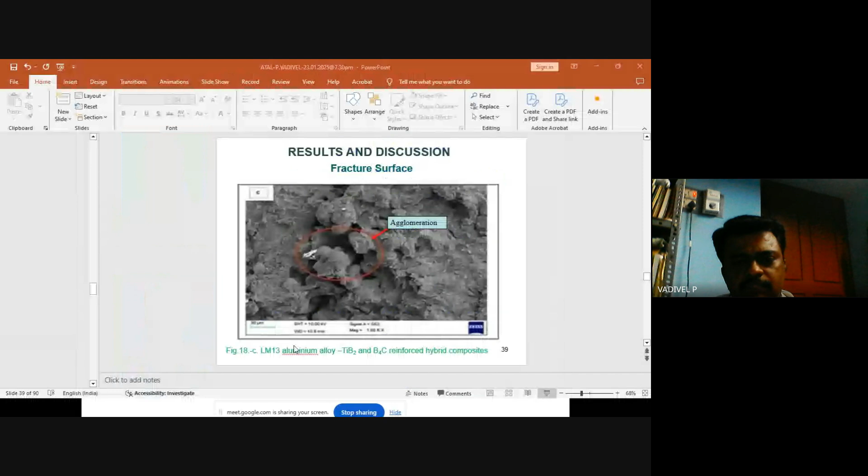Because I have placed this, you have given somewhere in BHN. I think I have seen it. Yes, sir, BHN you have given it. Yes, sir, we have done the hardness of the material, 126 BHN, sir.

Yes, sir. Where are the applications where we are going to use this, or any suggestions from you? Sir, actually we tried for the automobile engine part, implementing it in the automobile engineering part, sir. Okay, more wear and tear parts. Yes, sir, the wear and tear parts, and also for ships, sir, we are mostly focusing on ship engines, so that there is usage there, sir.

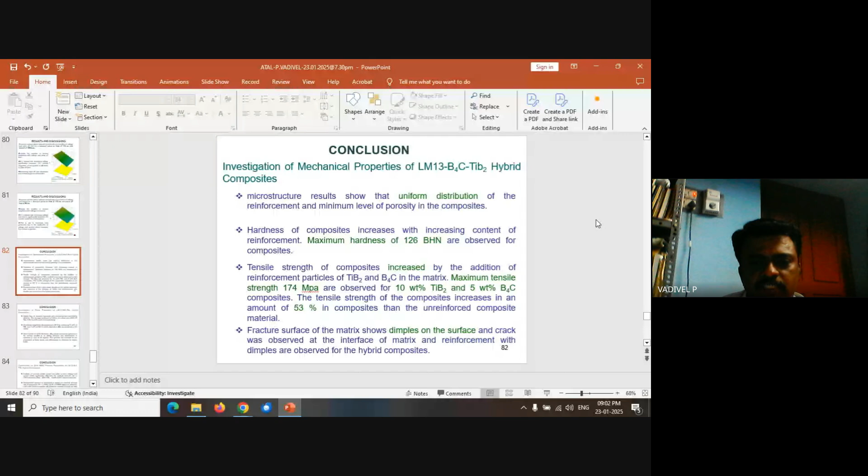Okay, thank you very much. Thank you, all the best. Thank you. Thank you, sir. Thank you so much, thank you, sir.